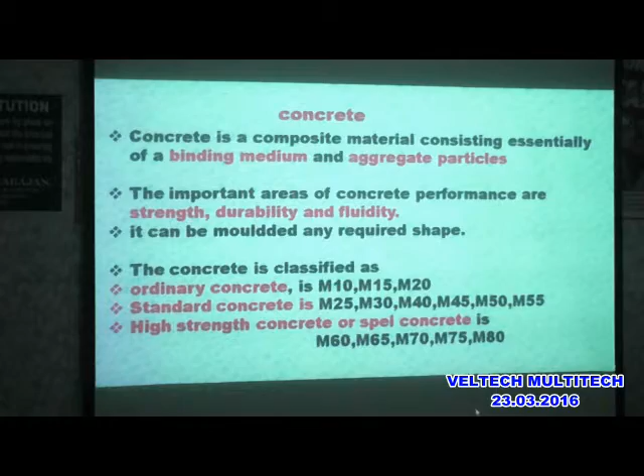So special concrete is also a concrete other than normal concrete. In special concrete, we are adding admixtures. Therefore, it is called special concrete.

Once you add an admixture, the concrete is going to perform very well, and the durability of the concrete is going to be increased. Durability is nothing but how many years the concrete is going to serve us.

So usually the concrete life period will be about 100 years. So at least 75 years it is going to serve us. After that, even after 75 years, the concrete is going to start disintegrating, such that the load carrying capacity of the concrete is going to be reduced.

Then we have to make some alterations. That means we have to demolish that structure, or we have to improve that structure such that it is going to serve us for the design period. So in the special concrete we are going to add admixtures.

If you keep silica fume on a surface, in the air it is going to fly, since its density is very less. But if you add silica fume into the concrete, it gives more compressive strength. The silica fume surface area is about 20 meters square per gram. That means if you take 1 gram of silica fume and calculate its diameter and surface area, it comes to 20 meters square per gram, which is 100 times smaller than the average cement particle.

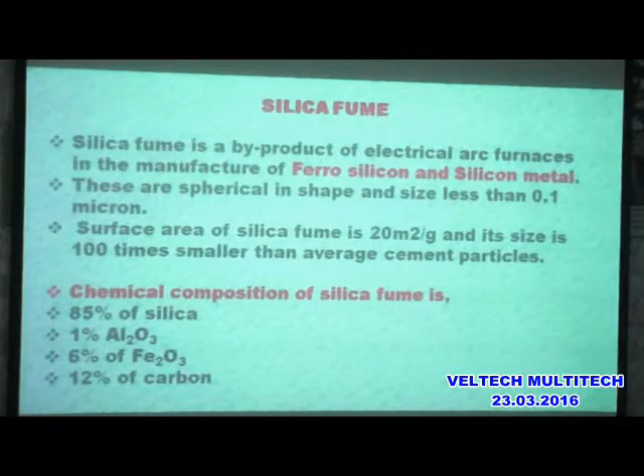The chemicals present in silica fume are 85% silica, 1% aluminum oxide, 6% Fe2O3 which is iron oxide, and 12% of carbon.

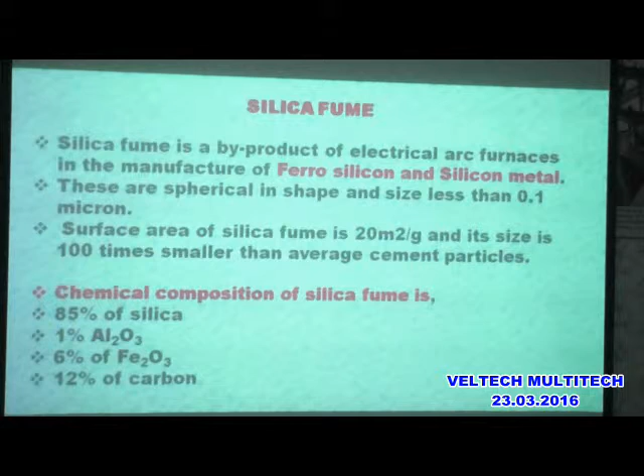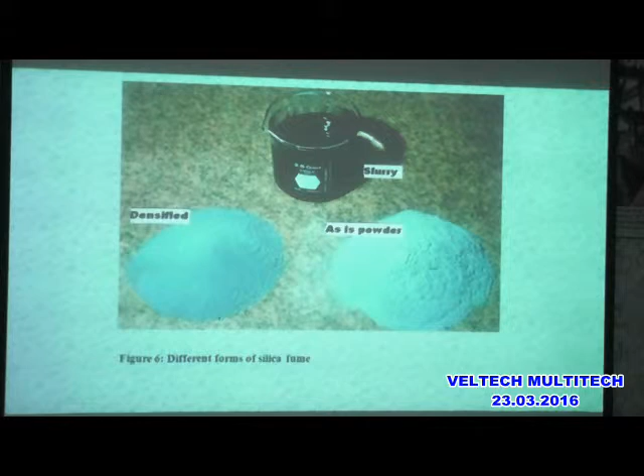So this is the photograph of the silica fume. Since the diameter of the particle size is very less, it flies in the air. So we use it in 3 forms - 2 solid forms and 1 liquid form. Since the particle size is very less, it is mixed with some fluid and is available in slurry form, as well as a finer particle form and a coarser particle form. These are the forms of silica fume available for concrete.

The properties of silica fume: specific gravity is about 2.2. The fineness is 20,000 meters square per kg. Average particle size is 0.1 to 0.5 micrometer. The unit weight of normal concrete is 20 kilonewton per meter cube, whereas the bulk density of silica fume is 130 to 430 kg per meter cube. The color is light grey to dark grey. Typically, 5 to 15% of cement is replaced with silica fume in concrete.

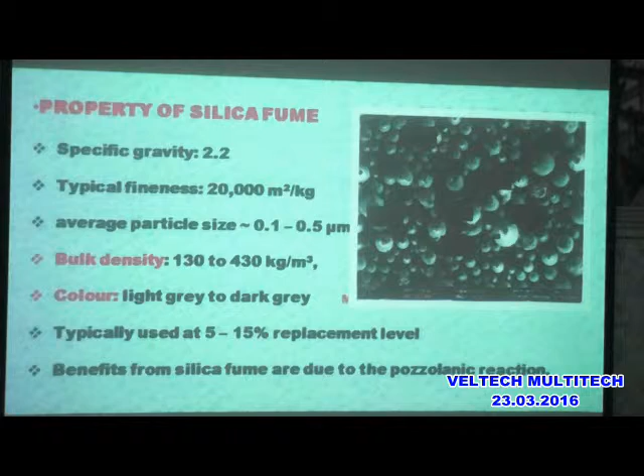The benefits of silica fume are due to the Pozzolanic reaction, which is nothing but a binding property. Then, silica fume concrete.

Here we use silica fume to replace some part of the cement, about 10% by weight. If you add this silica fume with cement, it acts as a super plasticizer and may be used for high strength repair concrete. This silica fume concrete can be used for fresh concrete in new work, and also for repair work. For example, in old buildings where the concrete in the roof slab is falling and the reinforcement is exposed and corroded, using some methods we repair that beam so it can take care of the design load. For this repair work, we use silica fume concrete.

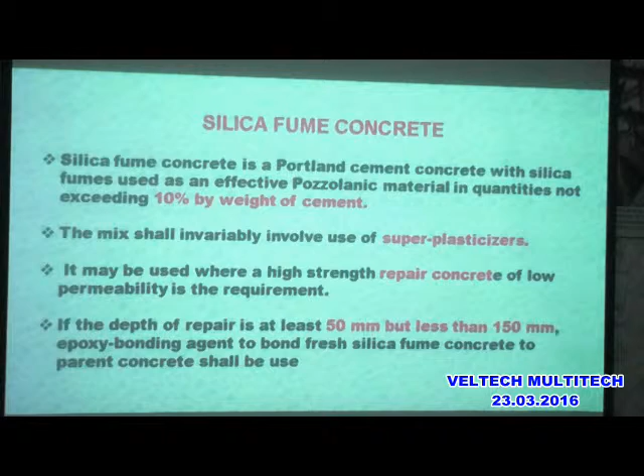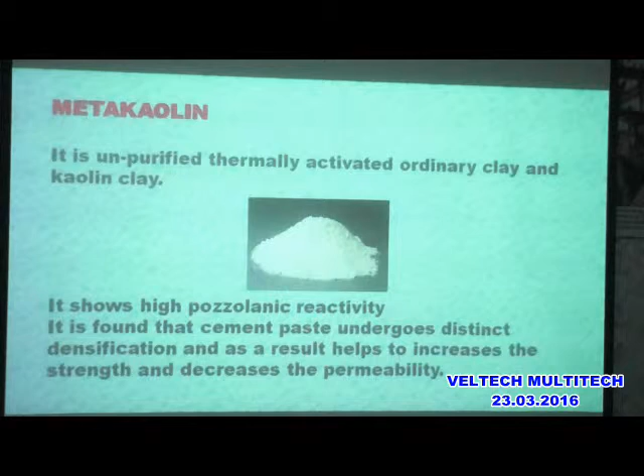This is another admixture used in concrete, called blast furnace slag. This blast furnace slag is a byproduct of pig iron manufacture, and its chemical composition is similar to Portland cement. The furnace slag is taken out and grinded again to sizes equal to cement particle sizes. This powder is then used with cement to improve the strength of the concrete, giving us a more economical cost of concrete.

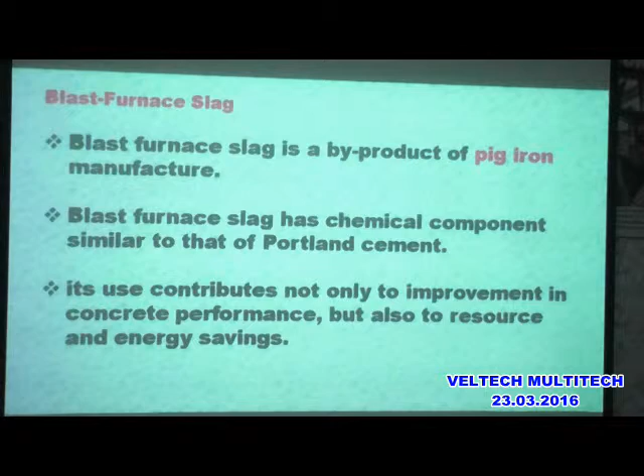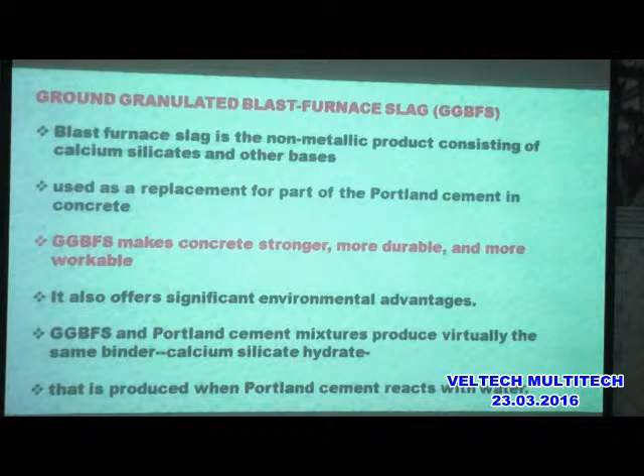Then GGBS, which is ground granulated blast furnace slag. GGBS is a non-metallic product consisting of calcium silicate and other bases. It is used to replace Portland cement. GGBS makes the concrete stronger, more durable, and more workable. More durable means it extends the concrete's life period, and more workable means it is easier to work with during mixing and transporting. It also offers significant environmental advantages. GGBS and Portland cement mixtures produce the same binder, calcium silicate hydrate, which is produced when Portland cement reacts with water.

So these are the chemical admixtures. Chemical admixtures are materials in powder or liquid form that are added into the concrete to improve its properties. One function is air entraining, meaning if you add this admixture, air bubbles are entered into the concrete, so that the air entrained concrete has less density and less weight. This chemical admixture is used for this purpose.

Then the water reducing admixture. Once we add more water to the concrete, it is easier to work with, but it gives less strength. To overcome this, this chemical admixture is used so that the quantity of water added to the concrete is reduced. Once the water quantity is reduced, after evaporation of the water it won't create air pockets within the concrete, thus reducing the water quantity required for the concrete mix.

Next is retarding admixture. Here, some chemicals, if added, reduce or delay the process. This means the concrete's initial setting time can be increased or decreased according to your requirement by adding this chemical admixture. Some chemical admixtures not only retard but also accelerate. For example, if the concrete's initial setting time is 30 minutes, adding this admixture can increase the initial setting time.

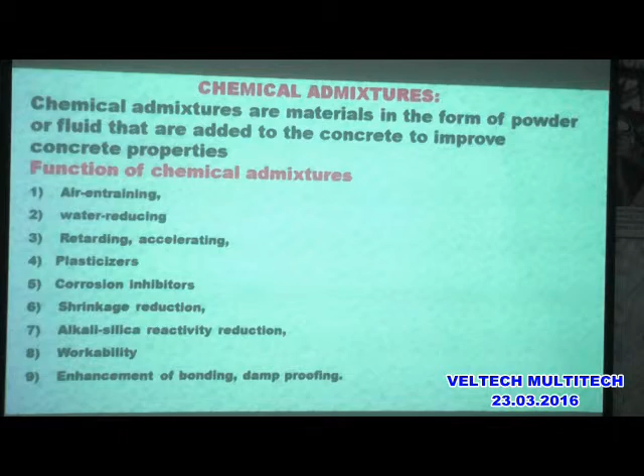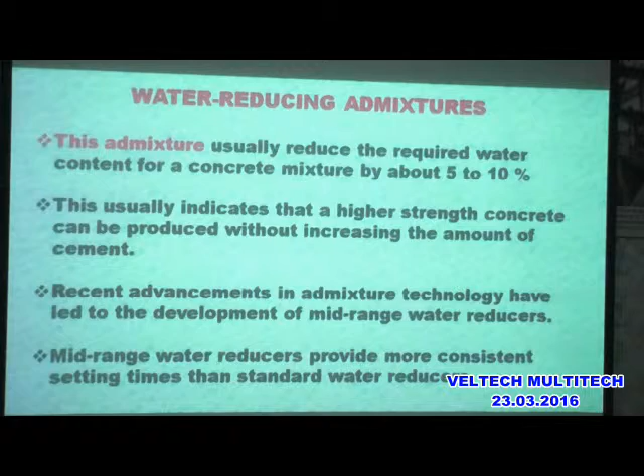Next, water reducing admixtures. These admixtures usually reduce the required water by about 5 to 10%, such that the strength of the concrete is increased.

Then, accelerating admixtures. These are especially useful for modifying the properties of concrete in cold weather. When the weather is very cold, we cannot use the same process as normal environmental conditions. There we use that accelerator so as to get the required property of the concrete. So these accelerating admixtures increase the rate of early strength.

Ordinary concrete will take 28 days to get maximum strength, even though after 28 days it will also gain more strength, but those gains are not accounted for in design. Even up to 10 to 30 years the strength keeps increasing, but 28 days is considered the maximum; after that the rate of increase is very, very less.

Then it reduces the time required for proper curing. At least 28 days of curing is required for cement concrete. Why do we use the curing process? At the time of the chemical reaction between cement and water, enormous heat is produced. If we don't relieve that heat, it causes internal cracks within the concrete, so we have to absorb the heat produced by the concrete's chemical process. There we add this accelerating admixture.

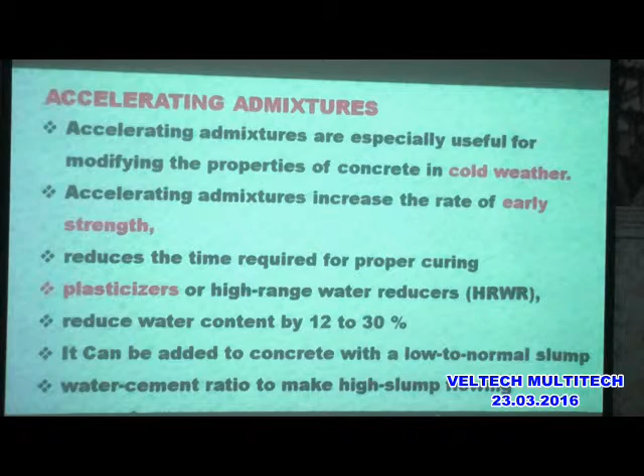Then it reduces water by up to 30% of the normal concrete requirement. It can be added to concrete with a low normal slump, and with a higher water cement ratio it can make a high slump flowing concrete. The slump test is used to decide the workability, so for different percentages of water added, the workability is estimated using the slump cone test.

Then the plasticizer is nothing but the water reducer. This is added to the concrete such that the quantity of water added is reduced, and the property of the concrete is increased.

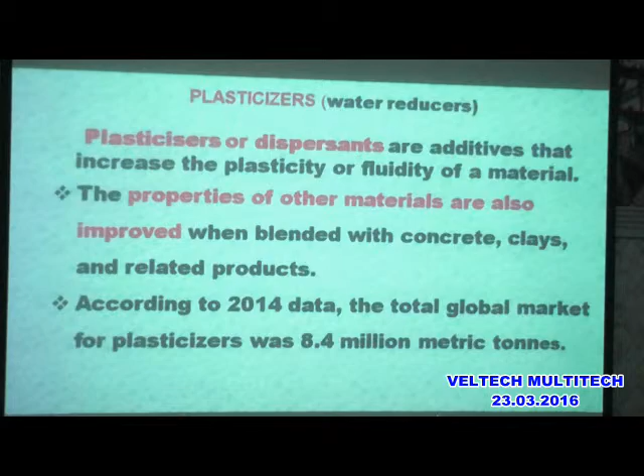Next, this is the super plasticizer. This is also a water reducing plasticizer. It allows reduction of the water without affecting the workability, enabling the production of self-consolidating concrete. This super plasticizer is added, and the concrete becomes a loose, flowable concrete that can be pumped. In olden days, concrete would be lifted using manpower to the 10th floor or any higher buildings, whereas now we use this super plasticizer with the concrete so that it becomes flowable and can be pumped from the ground level to wherever you want.

To get that fluidity, superplasticizers are added. This effect actually improves the performance and hardening fresh paste. The addition of the superplasticizer in the truck during the transit of RMC concrete is a fairly new development within the industry.

RMC is ready mixed concrete. In that ready mixed concrete, the superplasticizer is added so that the initial setting time is extended by 3 or 4 hours through this superplasticization.

After that time, it is going to settle and give the final setting. Correspondingly, it is going to gain strength, and after 28 days it achieves full strength.

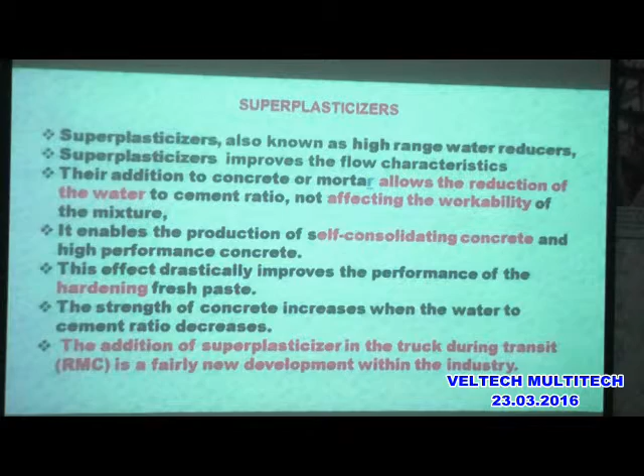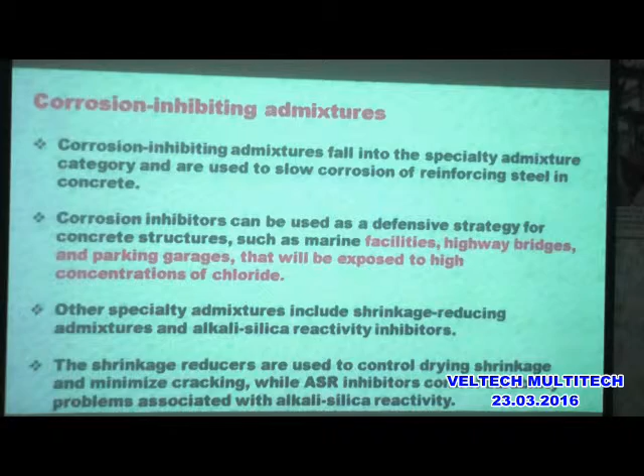This is the corrosion inhibiting admixture. If this admixture is added to the concrete, it is going to arrest the corrosion.

Next, the retarding admixture. Retarding admixtures, which slow the setting rate of concrete, are used to counteract the accelerating effect of hot weather on concrete setting.

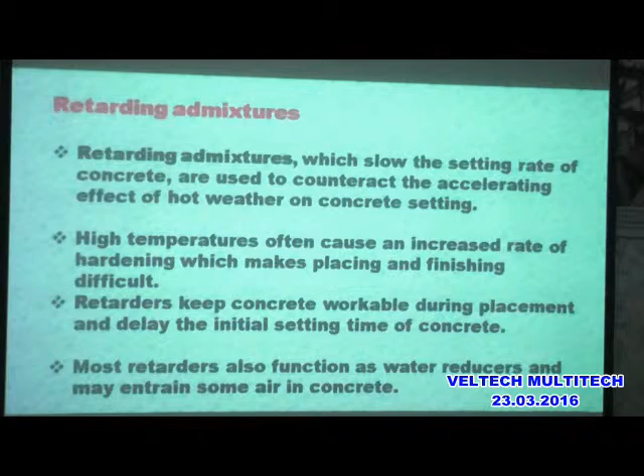Then the permeability reducing admixture. Already I told you permeability is the capacity of fluid to pass through the concrete. If the pores are interconnected, water is going to be absorbed through those pores.

That water is going to hinder the concrete's properties, mainly affecting its corrosion resistance. It is going to reduce the corrosion resistance property. There, the permeability reducing admixture plays an important role.

Then the water-cement ratio: most admixtures reduce the water-cement ratio, consequently reducing the permeability. Some supplementary cementing materials, especially silica fume, also reduce the permeability.

So these admixtures, when added, reduce the permeability such that the concrete becomes dense concrete. That dense concrete is able to take more load.

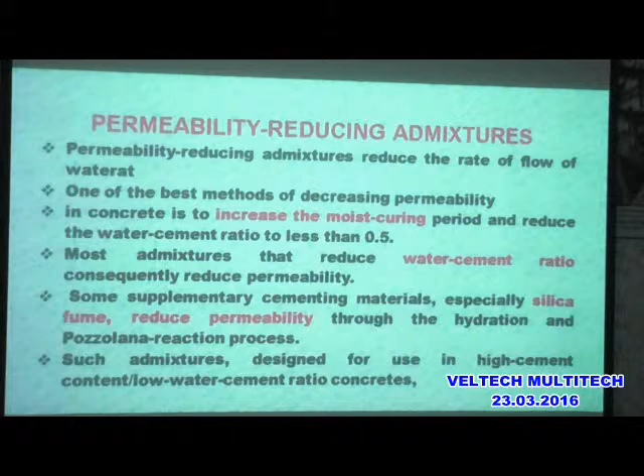Now we are coming to our topic on special concrete. What is special concrete?

If you add only cement, water, fine aggregate, and coarse aggregate, that concrete is called ordinary concrete. If you add some admixtures, that is called special concrete.

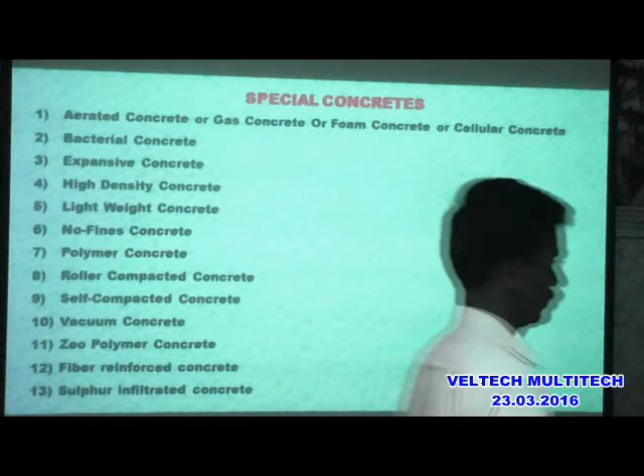This special concrete includes aerated concrete, also known as gas concrete, foam concrete, or cellular concrete.

Next is bacterial concrete. The third type is expansive concrete.

Then high density concrete, light weight concrete, no-fines concrete, polymer concrete, roller compacted concrete, self-compacting concrete, vacuum concrete, and geopolymer concrete.

And fiber reinforced concrete, and sulfur infiltrated concrete. These are the 13 types of concrete classified as special concrete.

So aerated concrete is nothing but concrete in which air bubbles are created. These air bubbles are created by using some chemicals.

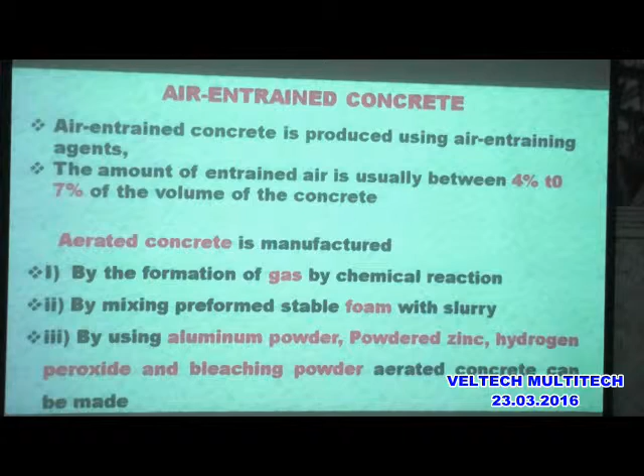For that situation, we use this air-entrained concrete, where air bubbles are allowed in the concrete, such that the weight and density are reduced.

The next item is bacterial concrete. Bacterial concrete is very important nowadays, and a lot of experimentation is going on with it. What is meant by bacterial concrete?

This bacterial concrete is concrete in which a bacteria named Bacillus is injected. This soil bacteria converts calcium into calcite precipitation.

The calcite is a hard material having calcium content, and it acts like lime. If you add this bacteria to the concrete, it will sit on the pores of the concrete, such that it creates calcite precipitation, filling that hole.

So once the bacteria is added to the concrete, that concrete is going to be dense. So where are we going to use this?

For example, in old buildings, cracks appear in the beam, maybe 1 or 2 mm in dimension. Within that 1 or 2 mm, physically we cannot repair that crack. So what we do is inject this bacteria inside the cracks. There, the bacteria converts into calcite, such that calcium is formed within the crack, filling it, making the concrete free from cracks, and increasing the load carrying capacity. So the bacterial concrete helps us in this way.

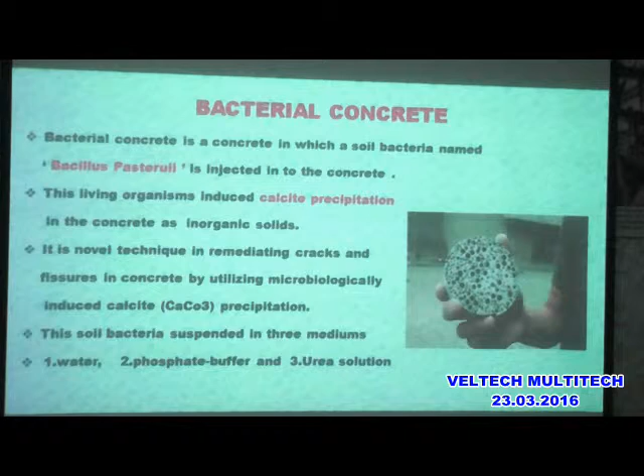Next, the properties of bacterial concrete: this bacteria is a single-celled organism that can precipitate calcium carbonate in the presence of carbonate sources, and it is not harmful to human beings. There are 4 types of bacteria available, out of which this bacteria is very sensible and does not harm human beings. But other...

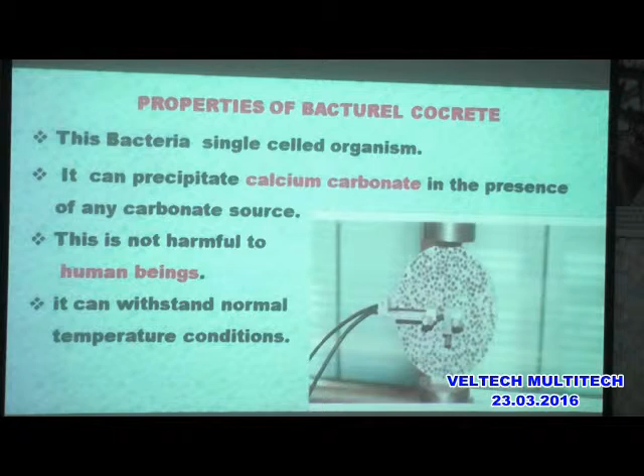Where is this bacteria available? It's available in the soil. Every soil has this type of bacteria, converting calcium into calcite, making the soil harder. If you add this bacteria into concrete, pores will be filled, or if added into cracks, the crack will be filled, helping the concrete.

Next, the advantages of bacterial concrete: this technique improves the compression, durability, and stiffness of the concrete. It precipitates inorganic crystals, which eventually plug the pores and cracks in the concrete.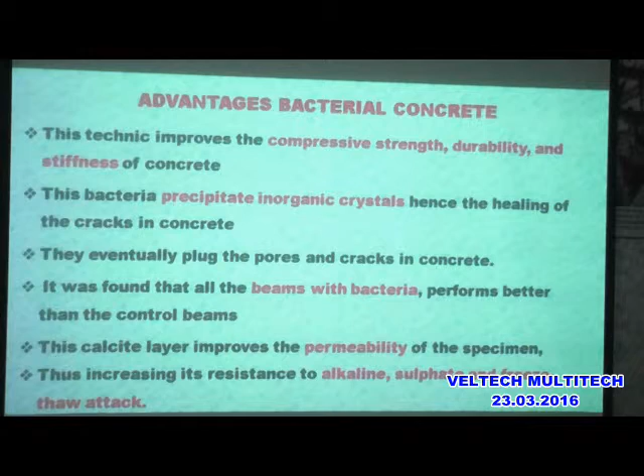It was found that the beam with bacteria performs better than the control beam. If a beam without bacteria and one with bacteria are tested and compared, the beam injected with bacteria gives more load capacity than ordinary concrete. Therefore, a lot of investigations are going on in this advanced bacterial concrete.

Next, GGBS is ground granulated blast furnace slag concrete, also called GGBFS. Ground granulated blast furnace slag is obtained from molten ash, and it is an industrial waste product. Here the ash is raised to maximum temperature such that it becomes molten, a flowing item.

Then this molten ash comes as particles, which are ground into fine particles like cement particles. This material is added with cement to increase the strength of the concrete. Usually this powder is almost white in color, and this concrete requires a long setting time. So adding GGBS increases the setting time, allowing us to work more hours with that concrete.

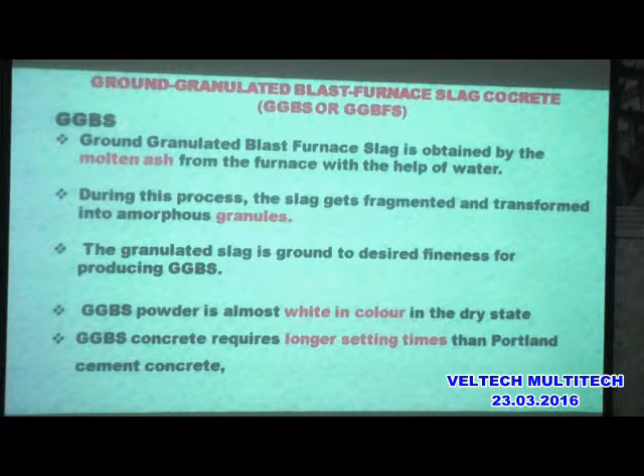The particle is finer than Portland cement, ranging from 4,000 to 6,000 cm square per gram, resulting in the 28 days strength being achieved within 2 or 3 days - that is the advantage. GGBS is replaced with cement at 25%, 35%, 50%, and 60%. This percentage of GGBS added with cement gives a stronger material.

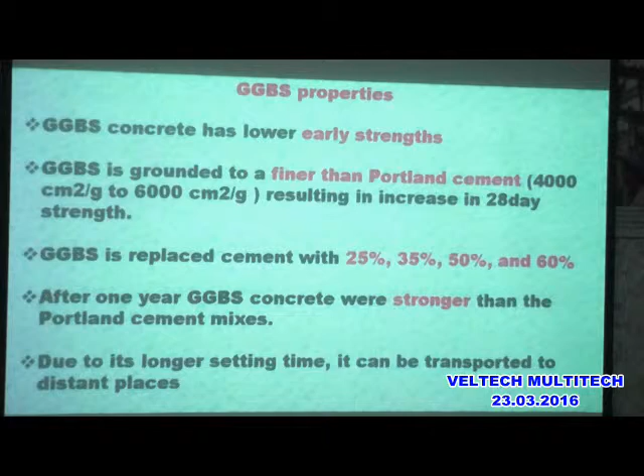Now the advantage of GGBS. When GGBS is used in Portland cement, it ensures higher durability. Durability means the lifelong period, or how many years the concrete is going to serve. Therefore, the concrete serves for more years once GGBS is added with the cement.

It reduces the temperature at the time of chemical reaction, reducing the thermal heat producing effect.

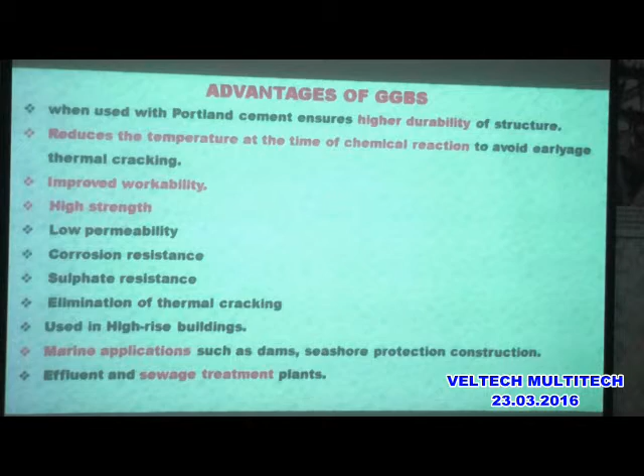It also improves workability, gives high strength, low permeability, corrosion resistance, sulfate resistance, and elimination of thermal cracking. It is used in high-rise buildings and marine applications such as dams, seashore structures, and effluent and sewage treatment plants. These are the places we use this GGBS concrete, which serves us for the required design period.

Next is lightweight concrete. Lightweight concrete is similar to the air-entrained concrete we already discussed. In lightweight concrete, the density is going to be less. How much less?

Ordinary concrete has a unit weight of 24 kilonewton per meter cube, whereas lightweight concrete is 13 to 18 kilonewton per meter cube. Thereby, nearly one fourth of the weight is reduced.

Similarly, nearly 25 to 30% of the dead load is reduced. Once the dead load is reduced, the size of the beam and the size of the structure is reduced. And not only the size of the structure, but the corresponding steel area required for that beam is also reduced since the load applied is less.

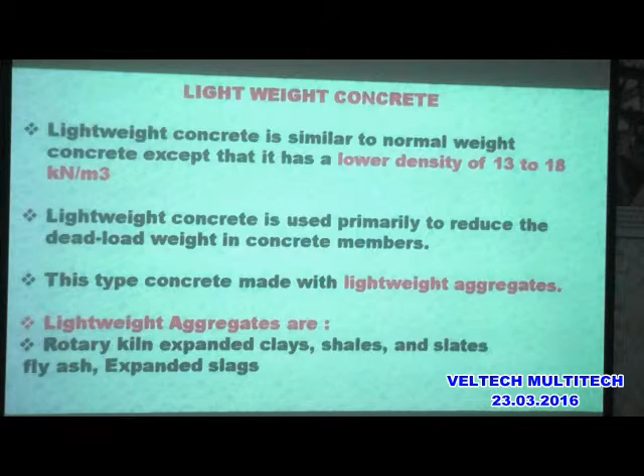Now the property of lightweight concrete. It is generally easier to handle, the slump value is 50 to 100 mm, and it is a pumpable type of concrete.

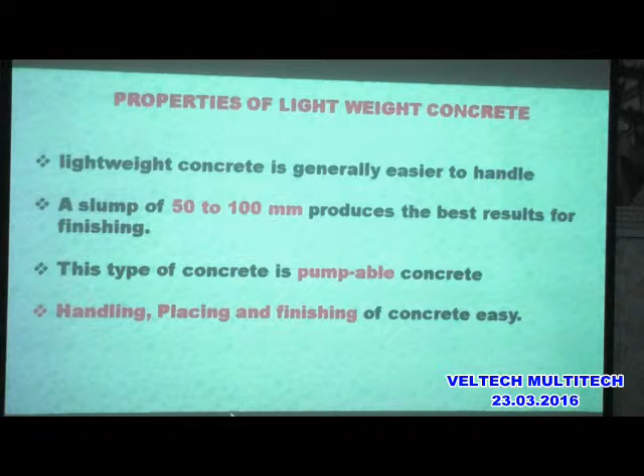So lightweight concrete can be easily pumped from a lower level to a higher elevation. Handling, placing and finishing of the concrete is very easy. That is the property of lightweight concrete.

Now the advantages of lightweight concrete. The benefits of using lightweight concrete include reduction in dead loads, correspondingly reducing the foundation width and depth, and it also reduces the reinforcement required.

The thermal properties improve fire resistance. A building may come across a fire accident, causing the temperature to increase. In some situations, if the temperature increases beyond 500 degrees centigrade, the structure has to be demolished. But if the structure is exposed to a temperature less than 500 degrees, we can make some repairs on the structure and then continue to use it.

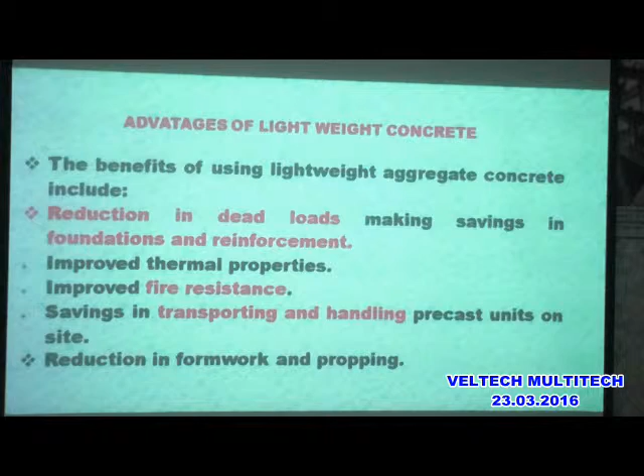Transporting and handling requirements are also reduced, and the formwork area required is also reduced.

Next is polymer concrete. This concrete is a very advanced concrete. Polymer concrete is an innovative and modern material. This polymer is made up of more than one molecule, called monomers, forming a long chain material which is nothing but the polymer.

This polymer is used as a binder with the cement, and polymers are essentially hydrocarbons, which are petroleum product items. The process of converting monomers into polymer is called polymerization. So single cells are converted into a long chain, forming a polymer, which is used as a binding material in civil engineering.

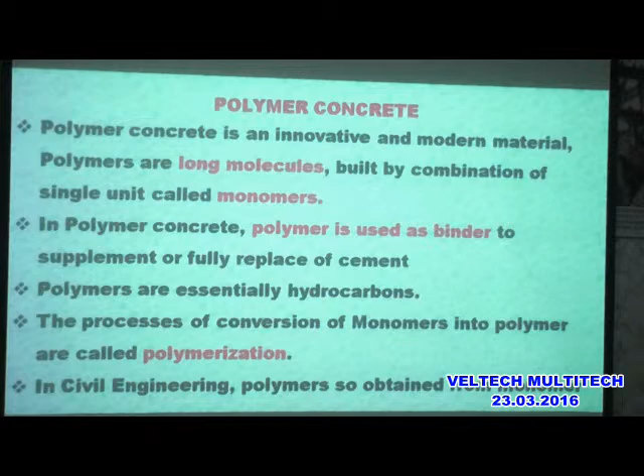Next, the types of polymer concrete.

Here we are having three types of polymer concrete. One is the polymer concrete, where only polymer is added in the concrete.

The another item is polymer impregnated concrete. Here the aggregate and sand is spread on that volume of the beam, then the polymer is injected or poured such that it is going to fill all the voids, such that it is going to bind the two different aggregates, such that the load transfer is going to take place.

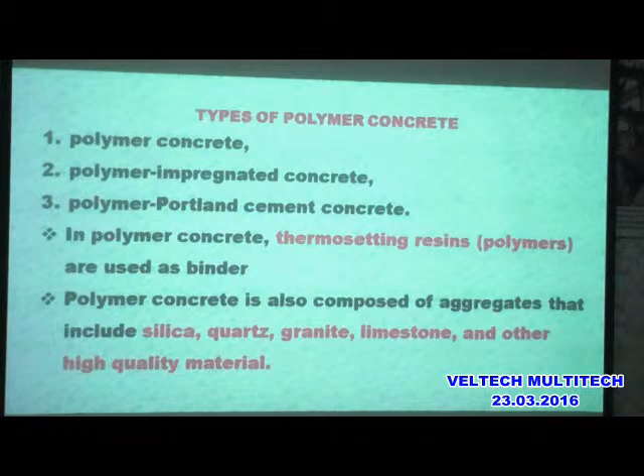The polymer concrete uses thermosetting resins or polymers as a binding material. The polymer concrete is also composed of aggregate that includes silica, quartz, granite, limestone and other high quality materials.

The polymer or epoxies are used in the concrete for achieving certain special properties, that is strength and durability, and this is acting as an admixture to improve the property of hardened concrete, such as chemical resistance.

This polymer concrete is going to achieve chemical resistance. Where do we come across the need for chemical resistance? When we construct tanks to store chemicals, if you use ordinary concrete, that chemical is going to destroy that ordinary concrete, then it is going to leak or give some damage. To avoid this, this polymer concrete is used in the chemical retaining structures.

It also improves bond characteristics, which is nothing but the bond stress between the concrete and the steel. Once this bond stress is induced in the concrete, then only the loads coming on the beam are transferred to the aggregate, and through this bond stress, the load is transferred by the aggregate to the steel. There the bond stress is going to make some influence.

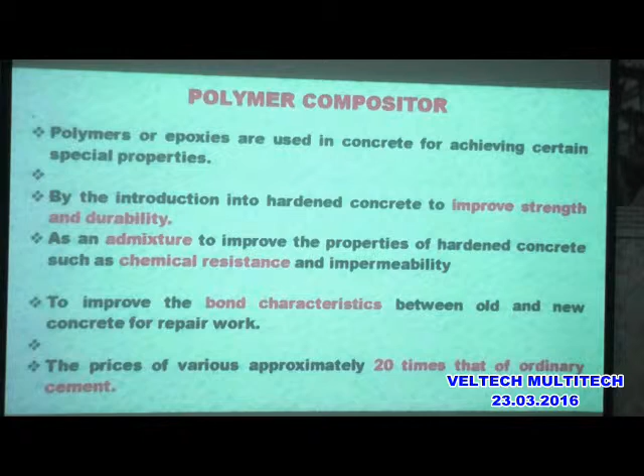The price of the concrete is approximately 20 times that of ordinary cement. So this is the disadvantage of polymer - the cost is 20 times more than ordinary concrete.

Then the properties of polymer concrete: it has low permeability, meaning it won't allow water penetration. And corrosive resistance, meaning it prevents corrosion of the steel, along with chemical resistance.

It is especially suited for construction and rehabilitation, meaning this polymer concrete can be used for new concrete as well as for repair works on old concrete. The polymer also has the ability to withstand toxic and corrosive sewage gases and bacteria.

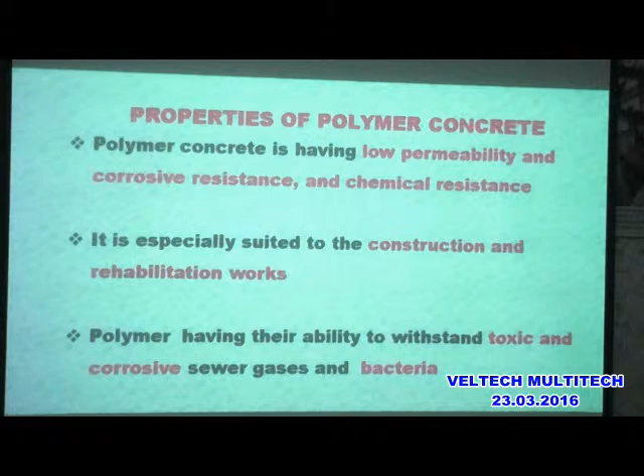The uses of the polymer concrete: the polymer concrete may be used for new construction or repairing of old concrete.

The polymer concrete is used for swimming pools. Here in swimming pools, if you use ordinary concrete, the water and chemicals are going to react with the cement particles, then seeping is going to develop. To avoid that, this polymer concrete is used for swimming pools.

Then sewerage structures and drainage channels and structures that contain liquid or corrosive chemicals, that is the tank which is used to store chemicals - there we are using this polymer concrete.

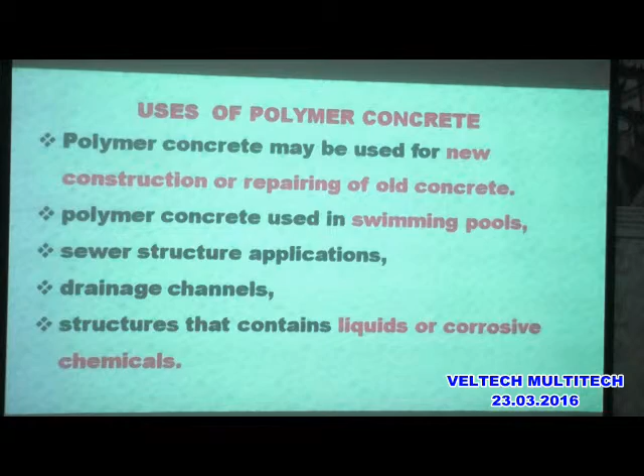Then the advantages of polymer concrete: rapid curing, meaning the curing time is very less, and it gives more tensile strength and flexural strength and compression strength, and it is very adhesive in nature.

So this polymer concrete is going to adhere with new concrete or even old concrete. Then there is long-term durability, meaning the life period of the concrete is going to be increased by this polymer concrete, along with low permeability and chemical resistance, and it is going to avoid corrosion.

The weight is going to be reduced such that the unit weight of the concrete is reduced, such that the load carrying or the cost of the concrete is going to be reduced. Then durability and high strength - these are the advantages of polymer concrete.

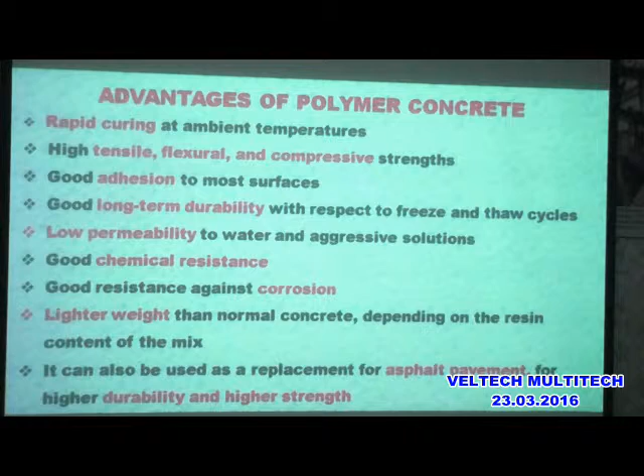Then the disadvantages - there will be advantages and disadvantages. This polymer concrete, in the USA people are using this concrete and it is giving very good performance. Since it costs more, it is not used much in India. In very few places we use it, such as nuclear plants or other important sectors, there we are using this polymer concrete.

The difficulty with the manufacturing techniques and some safety issues arise out of the use of polymer concrete.

The monomers can be volatile, since the polymer is formed only from monomers, so it is a volatile material. So once a fire accident happens, the concrete is going to be volatile, combustible and toxic.

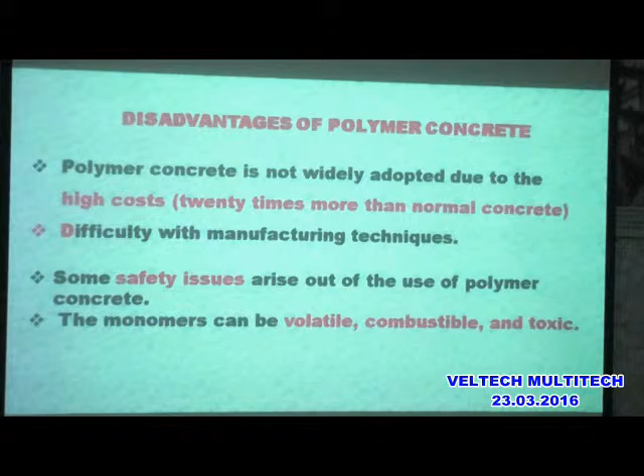Next, self-compacting concrete, that is SCC. The self-compacting concrete is an innovative concrete that does not require vibration for placing and compaction.

In ordinary concrete, when you pour it into a beam or slab, you have to use a vibrator such that the concrete fills without voids. Once the concrete is filled without voids, the density will be more, the load carrying capacity is more, and the concrete should not be honeycomb. There should not be any pores.

Self-compacting concrete is used in beams and roof slabs. If you pour this pumpable concrete on one side of the beam, it is going to flow inside where the reinforcement is dense, which you cannot reach manually with that much reinforcement. In such situations, we use self-compacting concrete so that it flows and fills the voids, filling the top of the beam without requiring any compaction, vibration, or poking, giving a dense and homogeneous concrete.

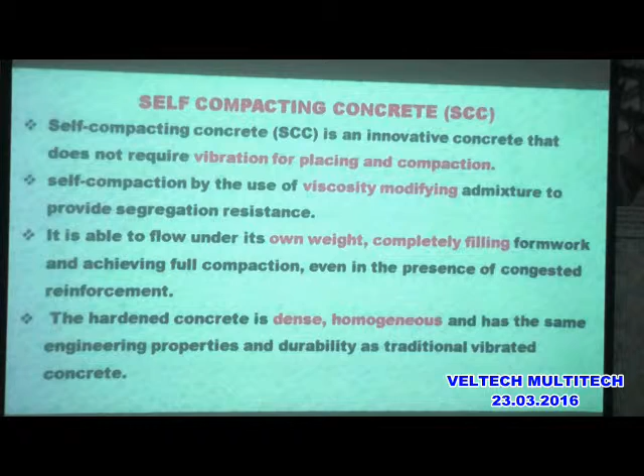Next, fresh self-compacting properties: it is a flowing concrete with filling ability, meaning it fills even small gaps between reinforcement, giving excellent deformability. The flowing ability lets the concrete flow within reinforcement gaps, filling beams and roofs and giving a dense concrete.

It also reduces segregation, meaning the particles do not divide. The compressive strength of self-compacting concrete is produced by increasing the admixture content up to about 2%. Adding this admixture increases the load carrying capacity of the self-compacting concrete by about 2%.

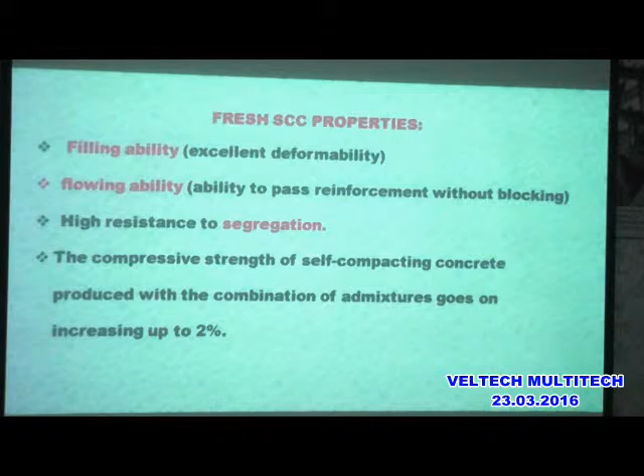Next, fiber reinforced concrete. Consider ordinary concrete: it is very weak in tension but very good in compression.

In some situations the concrete is used for tensile loads. Since ordinary concrete is very weak in tension, using it will cause cracks in the tension zone.

To overcome this problem, we add fibers. Fibers are small thin wires, which may be iron, polypropylene, nylon, asbestos, glass, or carbon. These are the various types of fibers available.

If you add these fibers within the concrete, they bond between two aggregates such that when tensile stress develops in that area, the fibers take care of it, increasing the tensile strength of the concrete.

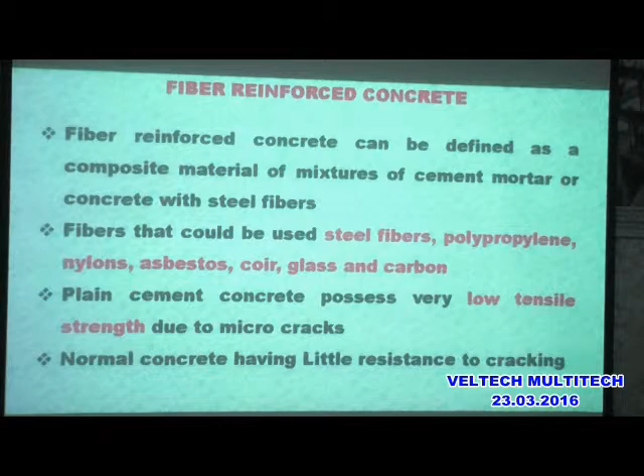So we add the fibers. The fibers are classified according to their aspect ratio, which is the length of the fiber to the diameter of the fiber. This aspect ratio falls between 30 and 150.

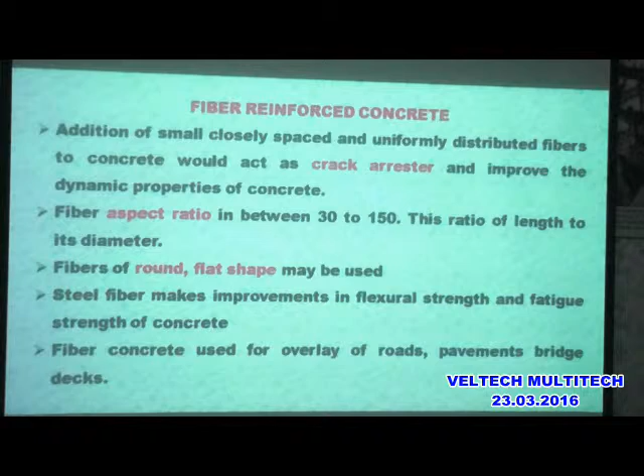The fibers come in two types: round and flat shape. Fiber improves the flexural strength and fatigue strength of the concrete. Fiber concrete is used for overlay of roads. Nowadays we use this type of concrete, adding fibers with the concrete, for pavements, bridge decks, etc.

Finally, we use this fiber concrete for safety lockers in banks and other important structures, using fiber reinforced concrete so it takes care of the tensile stresses that occur in the concrete.

In ordinary concrete, micro cracks are present. To overcome this, fibers are added. The property is that brittle failure occurs, and inserting large diameter steel reinforcement is not always possible, so we use fibers instead.

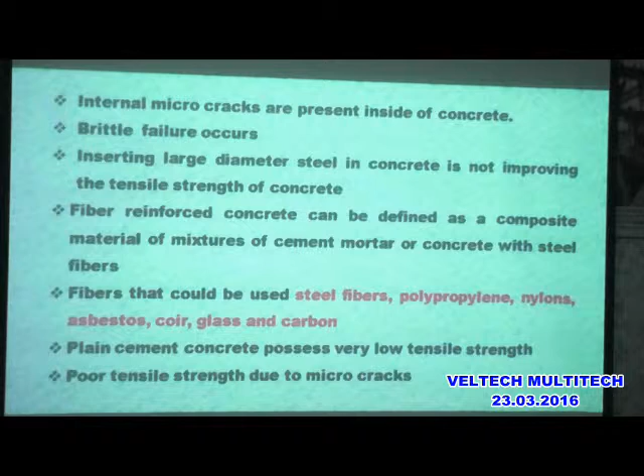There are three types of fiber. It gives more tensile strength and helps avoid cracks, increasing the tensile strength of the concrete.

The tensile strength of the concrete - for all structures, we are not considering the tensile strength of concrete; for tensile strength, we are using steel. But in water-retaining structures, some portion of the tensile stress is allowed on the concrete, such that you should not create cracks. Therefore, water-retaining structures are designed for flexure as well as crack control.

There we are going to use these fibers. If you use this fiber, it is going to increase the direct tensile strength by about 1.33% for 5% fibers. Thus adding fibers increases the direct tensile strength.

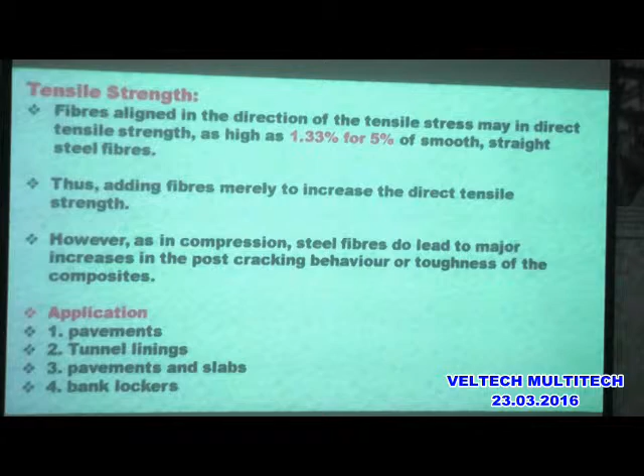The incorporation of steel fibers has applications in pavement concrete and tunnel linings - we can use this fiber concrete there, and also in pavements, slabs, and blast-resistant structures. That type of blasting damage will be reduced or avoided by fiber reinforced concrete. This type of concrete is used in bank lockers and safety lockers, and in important structures in nuclear power plants, we use this fiber reinforced concrete.

Next is no-fines concrete or pervious concrete. First, no-fines concrete - here the sand is absent, and we are using only cement and coarse aggregate. Once the cement-coated aggregate is used, the gap between two particles is not going to be filled with any material, and the cement makes a cover on the particles of coarse aggregate, which occupies a large volume, so that large volume gives you voids.

That void content is 20 to 35%. So this type of concrete is not used for RCC, but for cases where we need water to percolate into the ground, such that groundwater is improved. Therefore, we use this porous concrete in such areas. The drainage rate commonly ranges from 100 to 900 liters per minute - that is the water flowing capacity of this concrete.

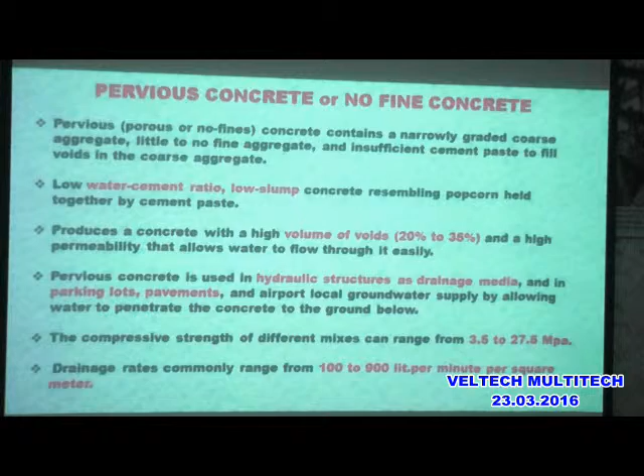Then the foamed concrete - here we use some chemicals such that foam is created in the concrete, and this concrete is self-leveling, self-compacting, and pumpable. This concrete is used in temporary roads and thermal insulation.

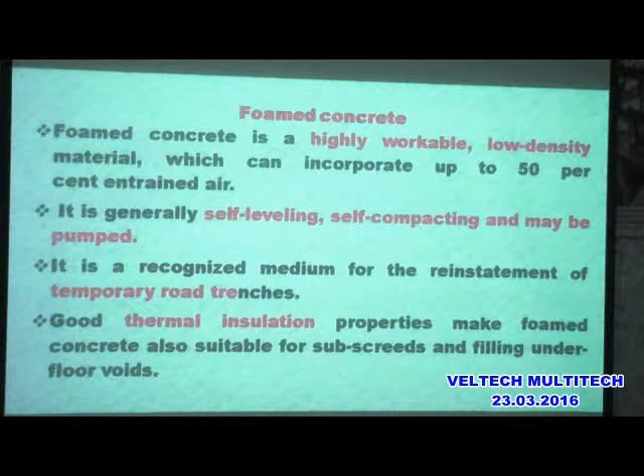Then the sulfur infiltrated concrete - the name implies sulfur is injected into the concrete. There, the concrete will not have any cement; only sulfur is used, in powder form. The temperature is increased such that the powder form sulfur is converted into a fluid form, and that fluid is injected into the aggregate. Then the sulfur fills the voids such that it gets a very good composition of concrete improvement.

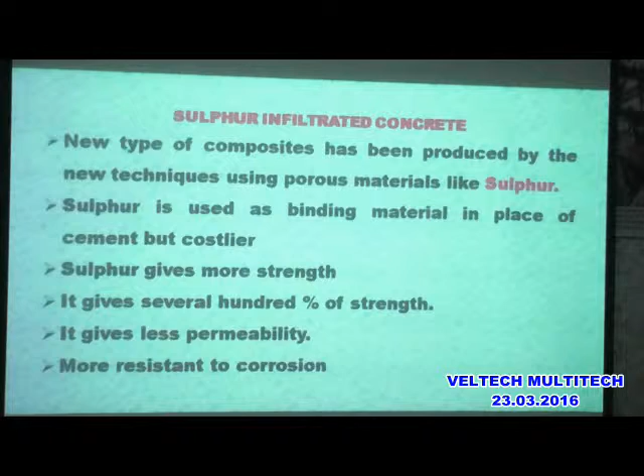But sulfur gives more strength - it gives several hundred percent increase in strength. For example, it can give M100 or M120 concrete with this sulfur infiltrated concrete. But it is more costly, and it gives less permeability and more resistance to corrosion.

The sulfur infiltrated concrete also gets more resistance, that is 100 N per mm square within 2 days. You need not keep this in water. Once this liquid is poured into the concrete, you have to allow that concrete to reduce in temperature - that period is the curing period.

The compressive strength increases 7 times compared to ordinary concrete, making sulfur infiltrated concrete very useful in precast industries, roof slabs, fencing, and railway sleepers. It cannot be applied as cast-in-place concrete because this concrete cannot be used on site - we have to make that concrete in a molten state, which cannot be done on site. Therefore it should be used in the factory, and precast items can be made using this sulfur infiltrated concrete.

So the strength gained within 2 days makes this process able to take more load.